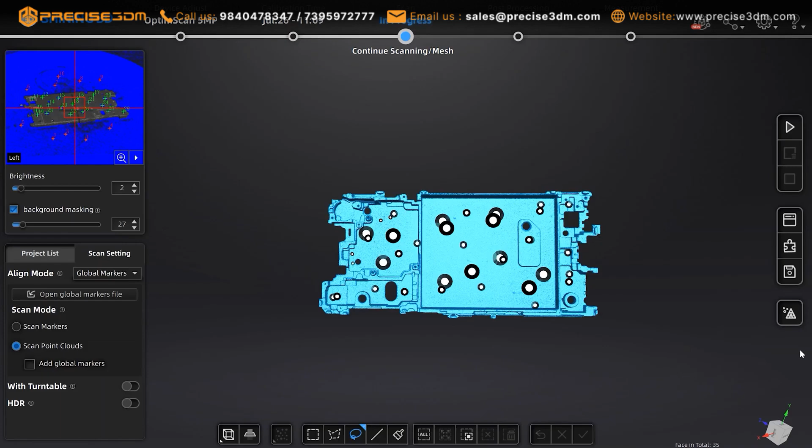We provide both unwatertight and watertight options. Watertight will fill all the holes automatically, and the model can be directly 3D printed. Unwatertight is an unclosed model that stays the way it is scanned. Processing time is shorter than watertight.

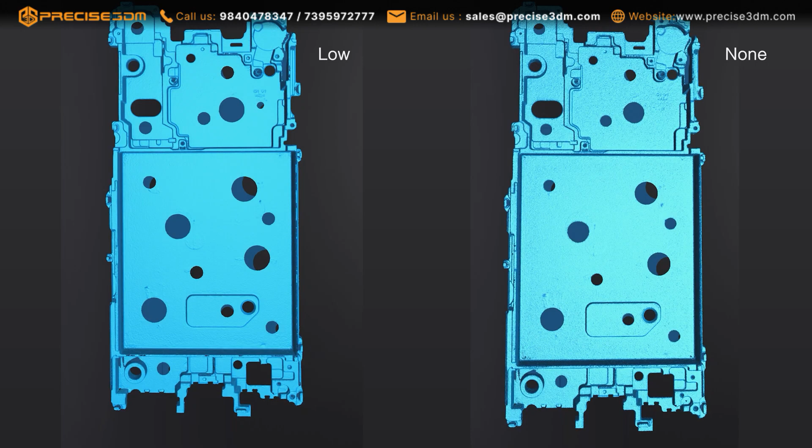Under the watertight condition, the first optimization option is filter. It is to optimize the data and improve the clarity of the data. Next is the smooth function. It can smooth the possible noise on the surface, and the higher the level, the less the details. Then we have the function to remove small floating parts. The higher the number is set, the larger the floating parts that will be deleted.

For the max triangles, you can set the maximum number of triangles of the scanned data, to set the limitation of the file size. About the fill small hole function: if you find the scanned data has small holes, select this function and set the perimeter. The software will fill holes smaller than the perimeter set.

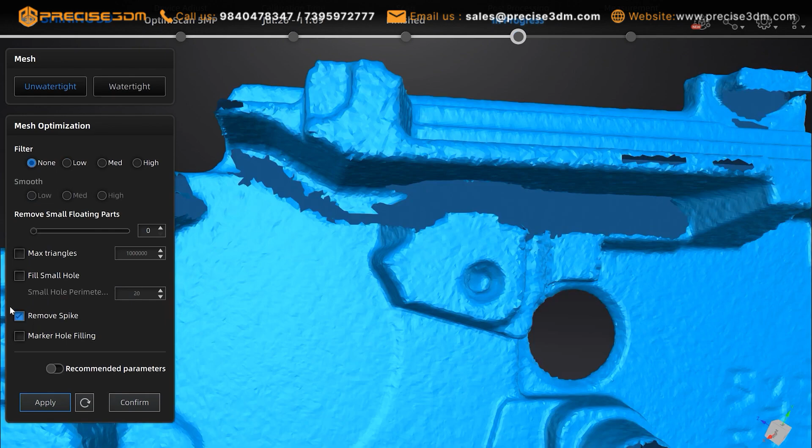The remove spike function will remove spike-like data on the edge. And the marker hole fill function will fill the markers' holes. At the bottom is the recommended parameters button. When turned on, it will automatically use recommended parameters for meshing. For the watertight option, you can set data quality, which is the triangle number of the meshed data. The lower quality has fewer triangles and details.

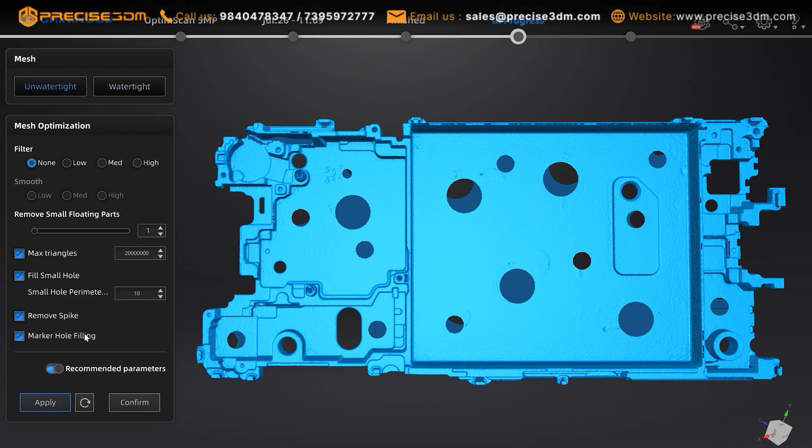After finishing the parameter setting, click Apply to do the meshing, and you will get a meshed model. If you are not satisfied with the data, you can redo the mesh with different parameters or go back to the scanning process to rescan. If the data meets the requirements, click Confirm to go to the Mesh Edit interface. You can edit mesh data here.

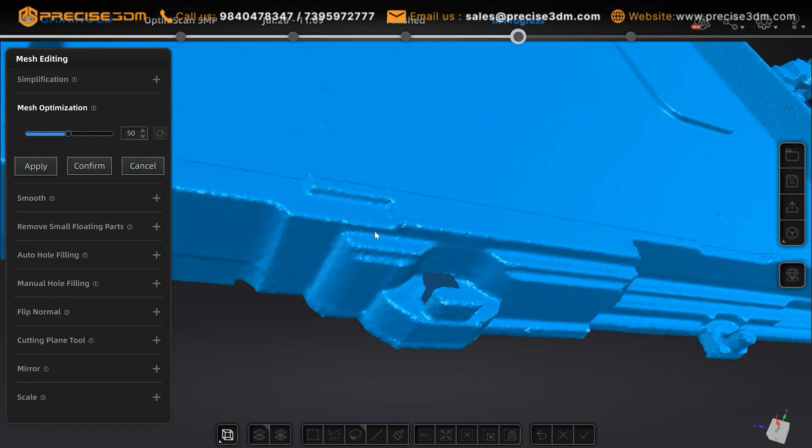On the left is the main menu. You will find some of them are similar to the mesh parameters. I will introduce the different ones. Mesh optimization can optimize the quality of the data by adding more triangles to the curvature regions.

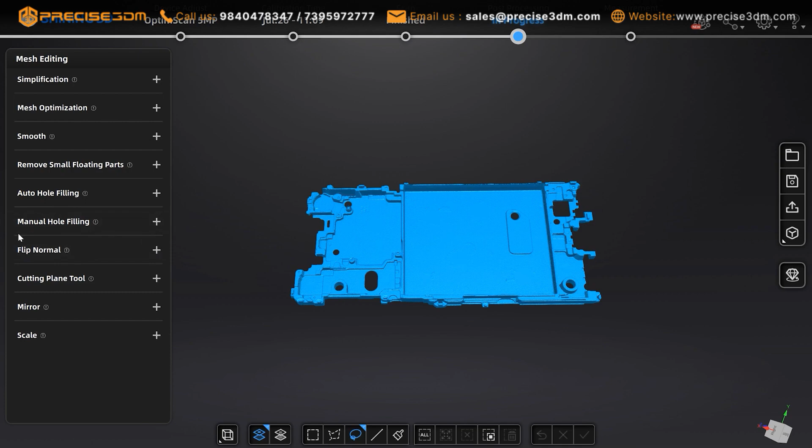Next is manual hole filling. When you click this function, the software will recognize the holes and mark them with a green edge. You can select the right filling method and click the edge of the holes to fill the hole. If you are not satisfied with the result, you can click here to redo the hole filling.

The flip normal function will redefine the front direction of the scanned data in reverse design. The cutting plane tool can define a plane by drawing a straight line, delete the selection, and close the mesh at the intersection. Also, you can use the cutting plane to align the mesh to the coordinate system.

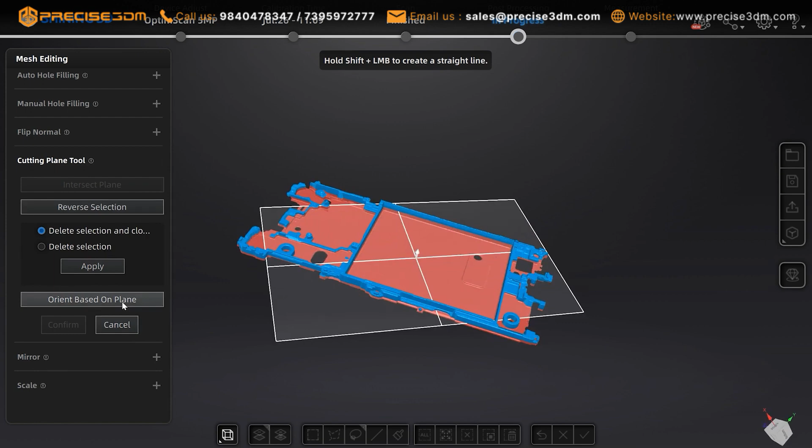If you want to create a model which is symmetric to the scan data, use the mirror function to mirror the mesh through a plane defined by a straight line. The last one is the scale function. It can change the geometric size of the data by the scaling ratio you set, such as length, width, and height.

Also, you can edit the data using the tools in the bottom panel and on the right panel. You can open other mesh data files or save the scanned data. If you have a Sketchfab account, you can click here to share your data via Sketchfab. Or click this button to open the data with third-party software like Geomagic Control X or Design X to do inspection or reverse engineering.

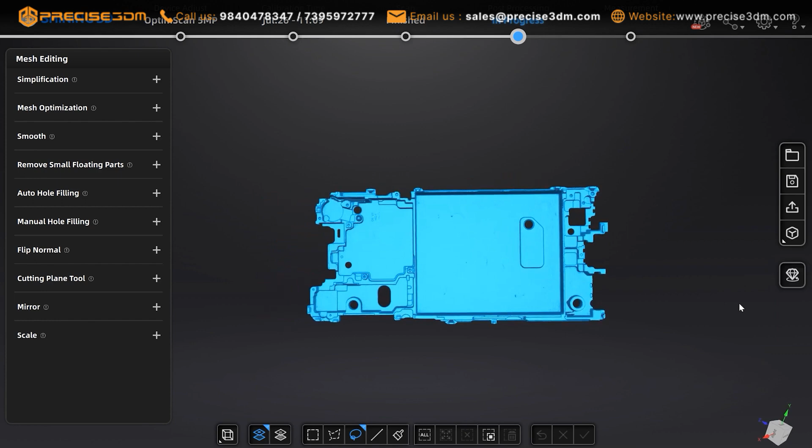And finally, we added an interesting function, the data display function. The data will rotate according to the position you set, and you can change the rotation speed. This is a very useful function to show the data to the customer. These are all the parameter settings and functions of the mesh process.